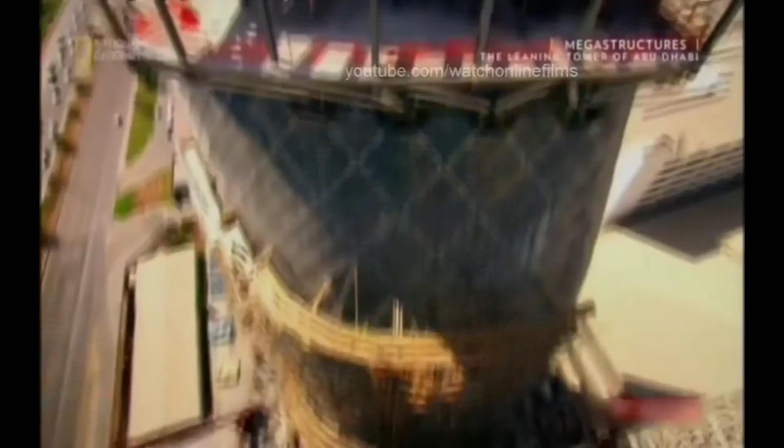To make it stand up, it'll take some extraordinary engineering that could rewrite the skyscraper rulebook.

Situated on the edge of the Persian Gulf lies the Sheikhdom of Abu Dhabi. It's the largest and richest of 7 states that unified in 1971 to form the United Arab Emirates. Abu Dhabi is undergoing one of the biggest makeovers of modern times.

Its ruler, Sheikh Khalifa bin Zayed Al Nahyan, wants to join the City Super League. And he's spending over $200 billion to transform his capital into a world-class business and tourist destination. He's already spent a reputed $3 billion creating the most expensive hotel ever built.

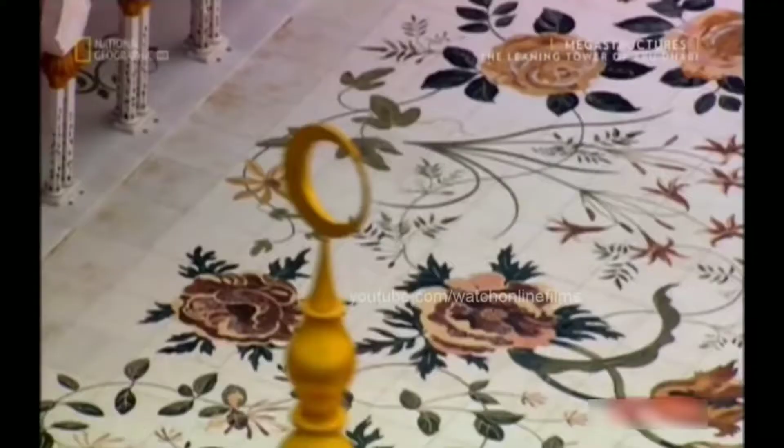The Emirates Palace boasts 114 gold domes and is the height of luxury, where rooms cost up to $12,000 a night. And that's not all. He's built one of the largest and most opulent mosques on earth. Capable of accommodating 40,000 worshippers, the Grand Mosque boasts the largest carpet on the planet and the world's biggest gem-encrusted chandelier. But even these structures have not quenched his thirst for the extraordinary.

Now, the Sheikh wants a building so spectacular it will instantly become an international symbol for Abu Dhabi. The man appointed with the task of delivering this architectural icon is the Sheikh's cousin, His Highness Sheikh Sultan bin Tahnoon Al Nahyan. Architecturally, it will be a unique building, positioning Abu Dhabi as one of the cultural hubs around the world, and architecture is part of that overall inspiration and art.

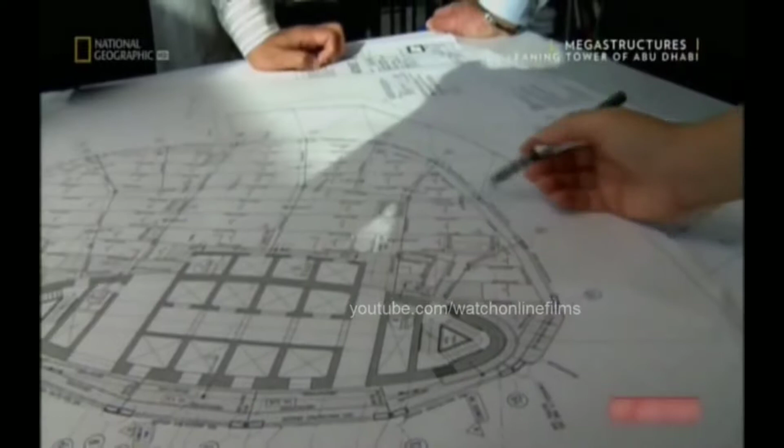It's a tough challenge. This is a land where extreme engineering is the norm. Neighboring Emirate Dubai has already built the world's tallest skyscraper, the 828-meter-high Burj Khalifa, and an iconic luxury hotel, the Burj Al Arab. Sheikh Sultan signs up a team of architects and gives them a clear brief, not to go bigger or taller, but to challenge the rules of architecture.

For Neil van der Veen, one of the concept architects, it's a unique opportunity. The spirit of the times in the UAE was that anything was possible. Really, you could do anything. We can do something in the architecture that will represent that Abu Dhabi is right at the cutting edge.

The architects look for inspiration in Abu Dhabi's landscape. They find it in the wind-swept dunes and the rolling waves of the Persian Gulf. We took this idea of wind and water, which are both dynamic, fluid type of rhythms of nature, and we said, how can we capture those in time? As a result, you get a much smoother façade. I was really very happy when we first saw it, because with such a building, you get the first impression from the first few seconds.

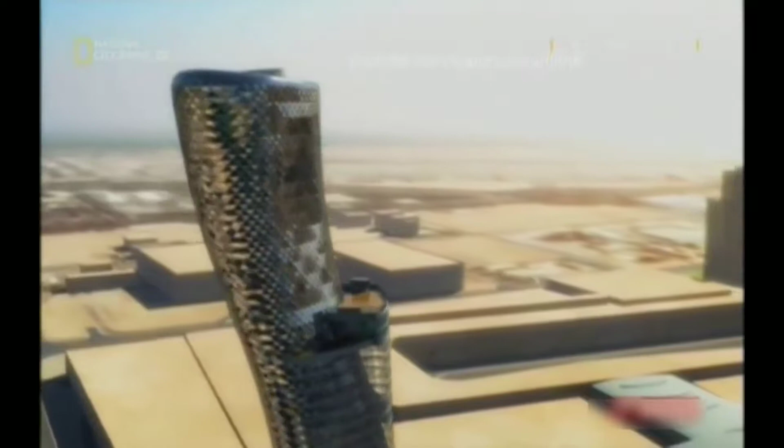The team come up with an extraordinary design. A tower that spirals out of the ground to 160 meters, inspired by a desert whirlwind and the splash of a wave rising over the sand. This gravity-defying skyscraper tilts almost 5 times more than Italy's Leaning Tower of Pisa. No single angle of this tower is the same as another. It's a structure guaranteed to amaze.

We really wanted this to happen. They could see a vision suddenly. They could see something that would stand for them. Then there was no stopping us. Sheikh Sultan wants the lower floors to become the most prestigious office address in Abu Dhabi, with the top 18 levels assigned as a 5-star hotel fit for royalty.

But for maximum impact, this landmark skyscraper also needs a prestigious location. The Sheikh decides the tower will stand next to a monument of national importance, the Grandstand. Built by his father and founding father of the United Arab Emirates, Sheikh Zayed, it's used to this day for national celebrations. This monument and the skyscraper will link Abu Dhabi's future with its past.

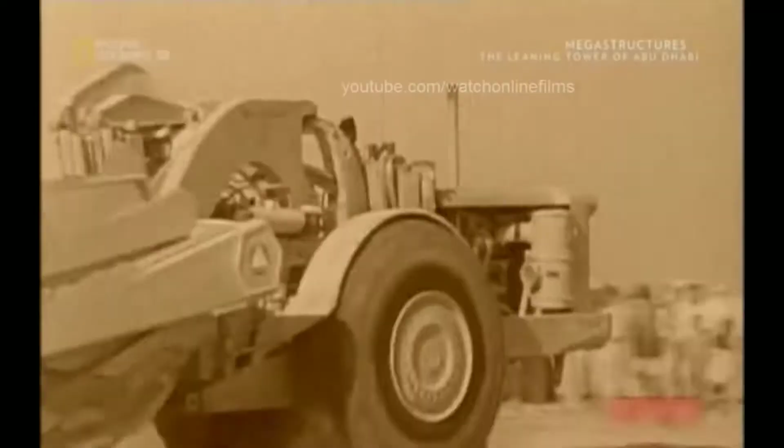Over the past 50 years, this land has experienced extreme change like no other. The discovery of huge oil reserves in 1958 set the wheels of progress in motion. Abu Dhabi's ruler Sheikh Zayed had a vision to unify the sheikhdoms and secure their financial future from Western dominance. He then set about using his black gold to create a city that rose out of the desert.

Today, Zayed's legacy is all around, and now his son wants to leave one of his own: to transform Abu Dhabi once again, but this time to put it on the world map. Sheikh Khalifa plans a new $2 billion business district called the Capital Center, situated alongside the Middle East's largest business hub, the Abu Dhabi National Exhibition Center. It's the ideal location for an architectural icon, and inspired by its location, the new tower is named Capitalgate.

Now, the idea must make the leap from the drawing board to the construction site. The only problem is, no one has ever attempted a skyscraper like this before. Everyone realized that this is a crazy structure to build, and how are we going to build it?

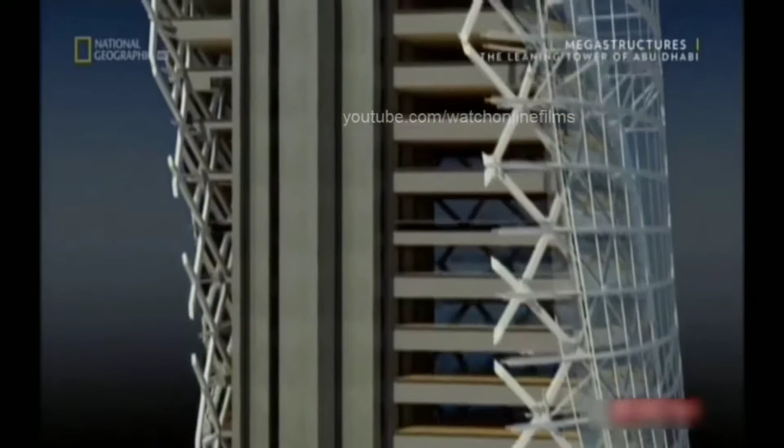To make Capitalgate's gravity-defying design a reality, it'll take some extraordinary engineering, and the challenge begins on day one. Its top floors overhang its base by 33 meters, creating huge forces that want to rip the building's foundations out of the ground.

At the construction site, project architect Tony Archibald is daunted by the task ahead. When I first joined the job, I was shown the drawings, and I kind of did a double take, and I wasn't quite sure that I got the correct understanding of the project, and it took me a few moments before I realized what we were about to undertake.

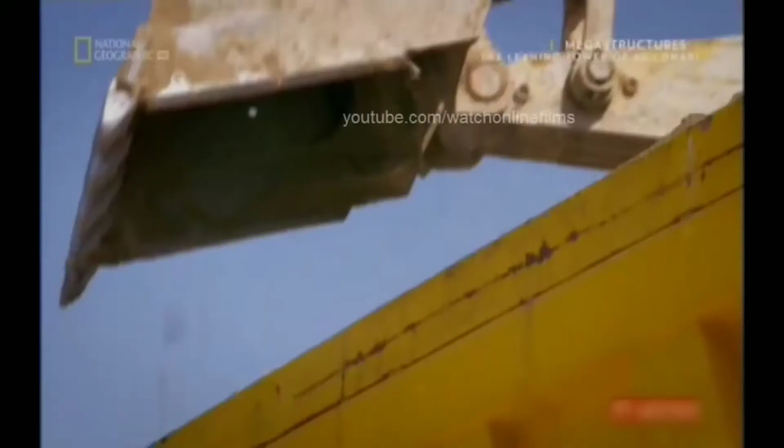Keeping Capitalgate upright is a huge engineering challenge. There isn't just one solution. To overcome the forces of gravity, it will take a whole range of pioneering techniques. But the task starts with the foundations deep underground. On one side of the building, the weight is going down into the ground. On the other side, it's being lifted out of the ground. And that's due to the large overhang that we're having to deal with.

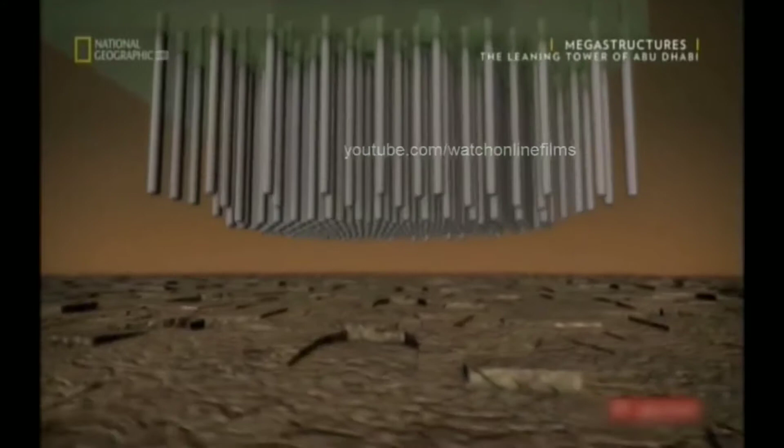The solution requires almost 400 concrete piles that work in 2 different ways. On the leaning side, half of the piles push the overhang's forces into the ground. On the opposite side, the remaining piles anchor deeper into the bedrock. They resist the stretching forces, trying to wrench the building out of the ground.

Finally, to evenly distribute Capitalgate's forces into the piles, a deep concrete slab reinforced with steel is laid on top. What the foundations taught us is that every single aspect of this building has to be custom engineered.

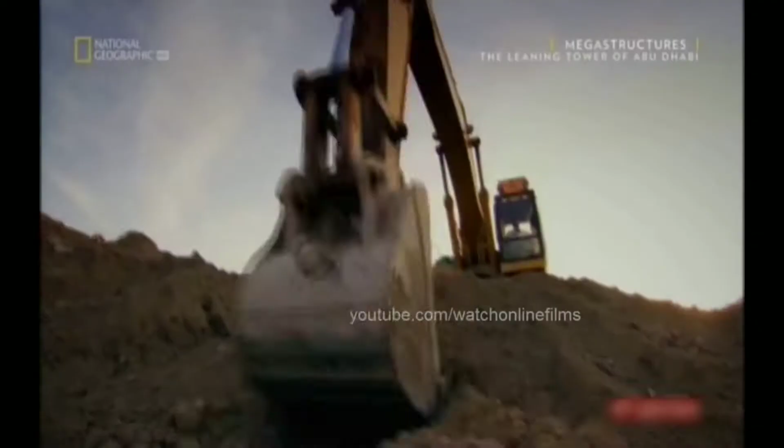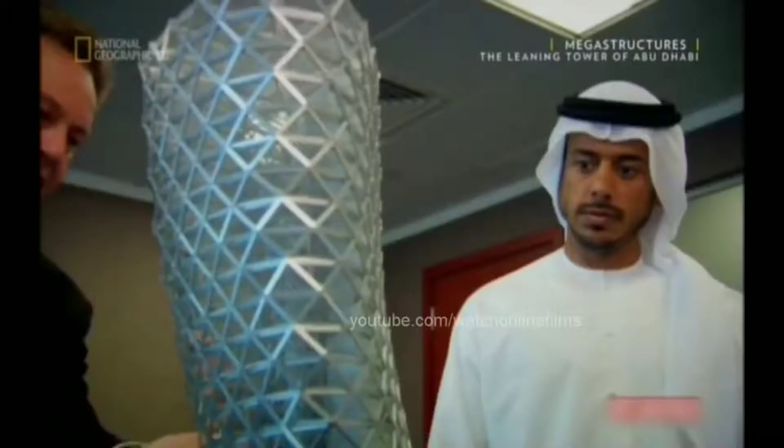Excavators dig out a colossal 6,000 cubic meters of sand. And over 8 weeks, hundreds of piles are driven into the ground. We had an awful lot of piles to put in a very close proximity. It was a real difficult challenge. There can be no let-up on this schedule. Sheikh Sultan wants Capitalgate complete by an impossibly tight deadline.

With the foundations finished, building above ground can begin. But because of the dramatic lean, it will have to be constructed in a very different way to a conventional skyscraper. We realized once we'd done the foundations that this was going to be the first of many difficult problems. A normal skyscraper requires a solid core to hold it upright. But Capitalgate's curves will just crack and topple a standard core. Engineers must discard conventional thinking and devise a way to defy gravity.

Inspired by the nearby desert landscape and its wind-shaped dunes, architects have designed a curved leaning tower. But it'll take some audacious engineering to stop Capitalgate from falling over. Normal skyscrapers are built around a slim vertical core, which helps to channel the building's weight into the ground. There's so much overhang on this building that a conventional core was no way going to work. You just can't build a straight core. It's just not strong enough.

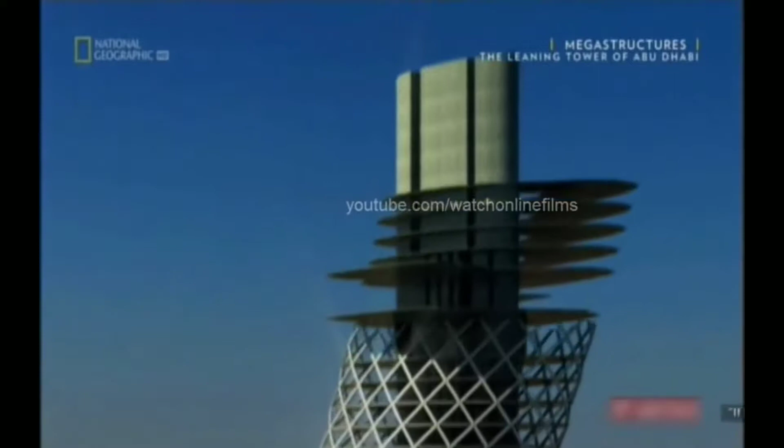Capitalgate's design would cause a conventional core to bend dangerously. The pull of the massive overhang wants to stretch the core on one side, causing the concrete to tear apart.

Structural engineer Mona Vassi knows it's a serious problem that must be solved. When I saw this one, I thought it's impossible, it's not going to work. It's just some sketch, somebody left it somewhere. But I always think that for the architects, it's easier for them to just draw something, but it's not easy for us to fulfill or satisfy their needs.

The engineers developed two groundbreaking solutions. The first part of their plan is to build the core with a curve, bending in the opposite direction to the building's lean. As the structure grows, its weight pulls the core straight. In total, it shifts 350 millimeters, and the effect is significant. The concrete that would have been stretched by the overhang's pull will now be compressed and strengthened.

You build it bent, and then as you add the slabs to the upper levels, it pulls it back into vertical. So basically that whole vertical core is in compression, and that gives it immense strength.

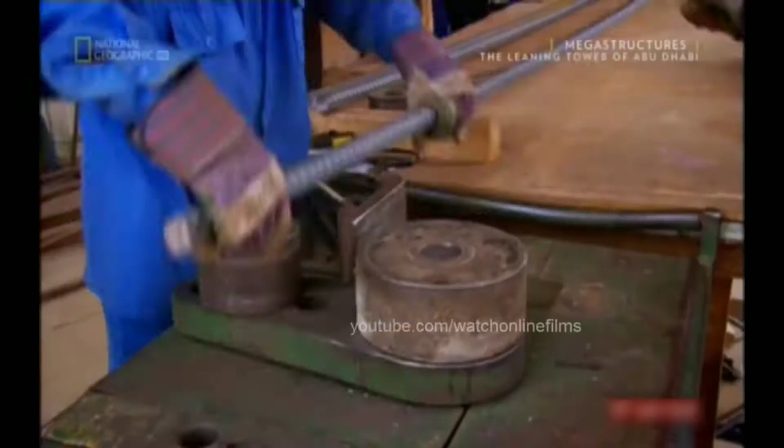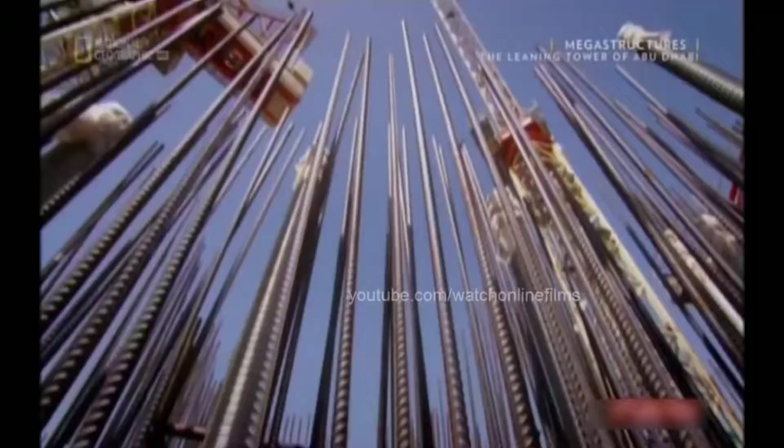The core grows 4 meters a week, and construction manager Les Fairchild is in charge of building it. This is probably the most complex core that I've come across. It's built at an angle, and effectively the core holds the whole building up. The core is built using a technique called jump forming.

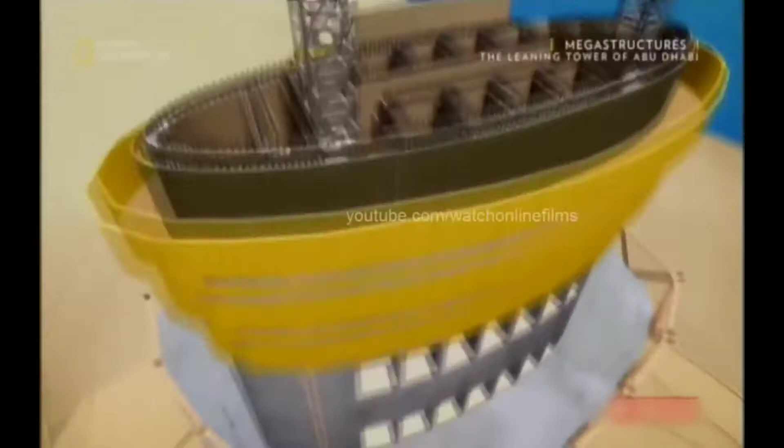First, a dense mesh of steel reinforcement is assembled. A mold then closes around the steel to form the shape of the core. The steel mesh is then filled with concrete. Then the mold or form can climb up the core wall for the process to start all over again.

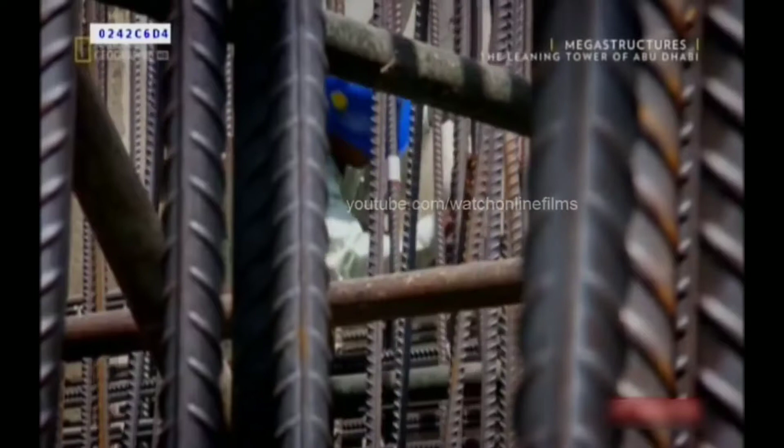Jump form is a hydraulic platform. Once we've cast each 4-metre level, we simply attach it to some runners and we jump it hydraulically up to the next level. The core will be strengthened as it straightens. But for the core to carry extreme loads, the concrete must be reinforced using steel rods called rebar.

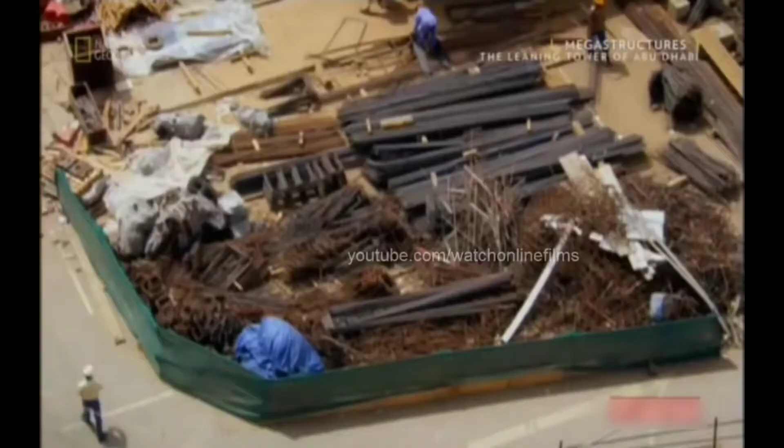The rebar is installed during the daytime, but temperatures of up to 50 degrees Celsius and concrete don't mix. It dries too fast and could crack. To set at the right speed, the concrete has to be poured during the cool of the night. As the core grows higher, the liquid concrete has to be pumped over longer and longer distances. So the consistency of every batch is first checked in a slump test to ensure it won't block the pipes.

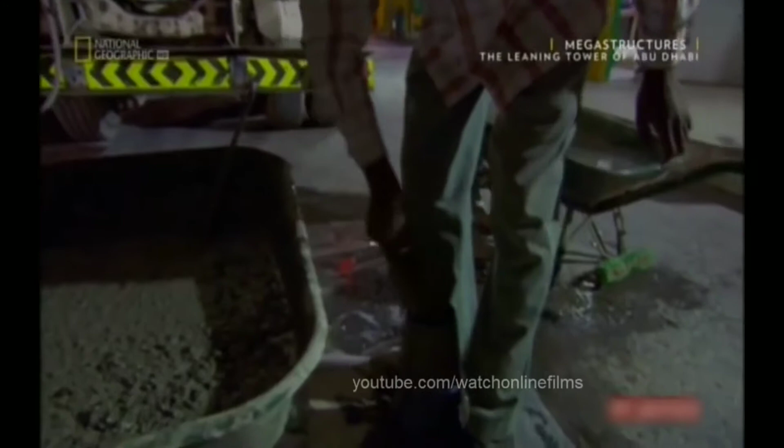When you first see it coming out the wagon, you can usually tell whether it's a tight mix or whether it's a loose mix, and that's what we're testing for really in the slump test. We simply make a cone, lift the cone off, and depending on how much it reduces in height, tells you exactly what the slump is. The one we just witnessed is 215 millimetres, which is within the specification, so that's good to go.

Whilst the truck drives to the pump, Fairchild needs to get onto the core. He can take the stairs, but 90 meters up is a long climb. He knows a much faster way. Crane lift.

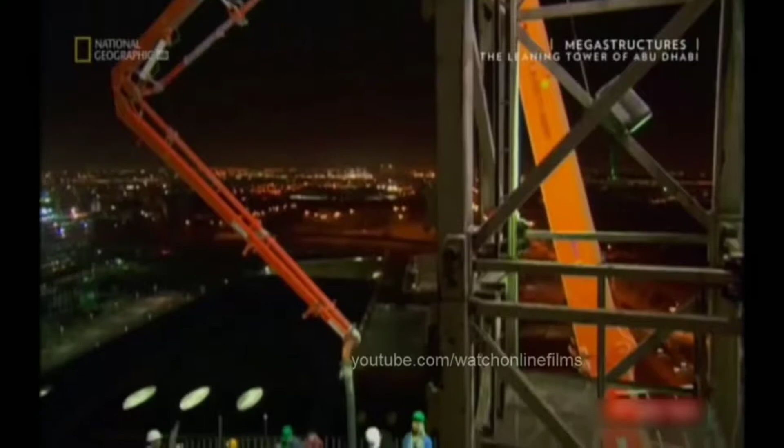It's going fairly well. We've had a nice continuous supply of concrete and we're now pumping it up to the upper levels of the building. And the lads are just steadily working away. They actually work from one side to the other in metre deep layers, so they're doing everything right. It's always exciting when we pour concrete. It means it's another achievement really. We're going up another level.

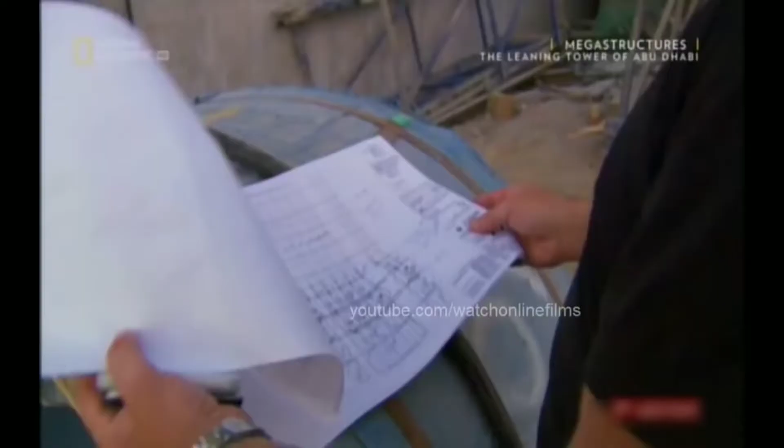But building the core out of alignment and packing it with rebar still isn't enough to stop gravity toppling Capital Gate. What we came up with is a post-tensioning solution where we introduced much more reinforcement into the core wall and then used the tensioning process. Basically that was done by introducing high tensile strands to the centre of the walls. When we reach the designated height, we simply apply tension.

We're actually stretching the tendons that fall through the wall and we're actually pulling them tight, and that's done by a tensioning machine. So effectively, when the tension is complete and the load was applied, the core would stay intact and the additional reinforcement would prevent it from falling over.

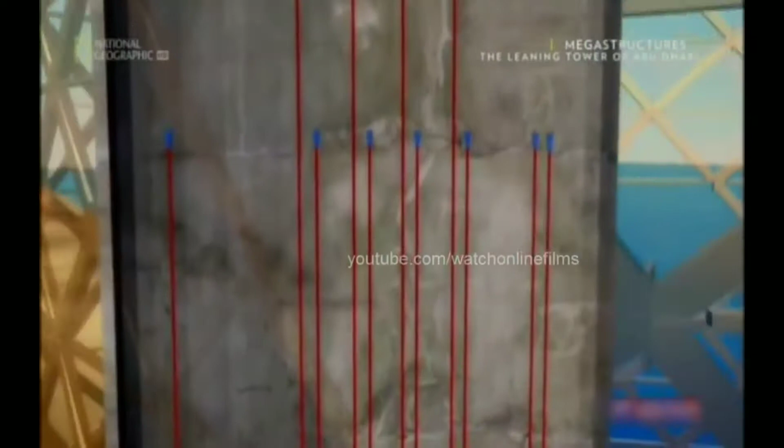To post-tension the core, 146 steel tendons are threaded vertically through the concrete. Each tendon is 20 meters long and runs through 5 floors of the building, overlapping each other for maximum strength. When the tendons are stretched, the stress counteracts the pulling force created by the massive overhang, stopping the concrete from tearing apart. Okay, stop. Okay, start moving.

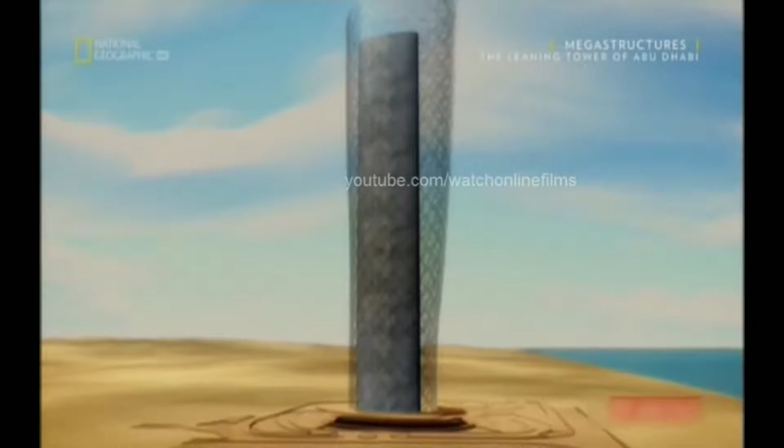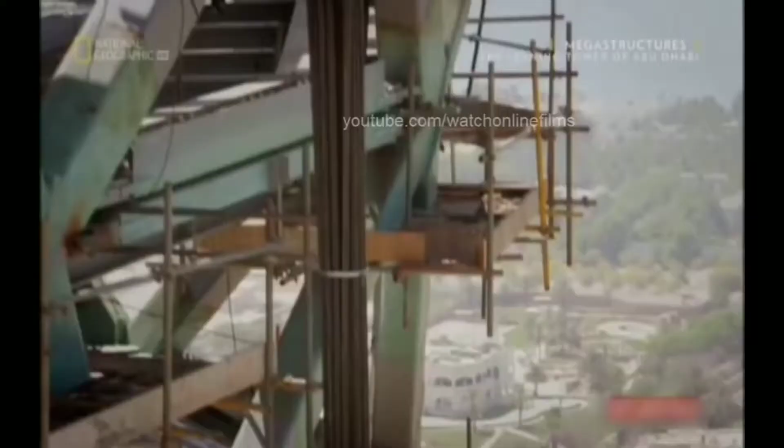On site, the team are post-tensioning the core. But no one has ever attempted this vertically in a skyscraper. The long tendon is lifted to the top of the core. The team used the steel tendon's weight to force it through a duct already cast through the core. Once the tendon is in position, the team lock off both ends, ready to tension its individual strands.

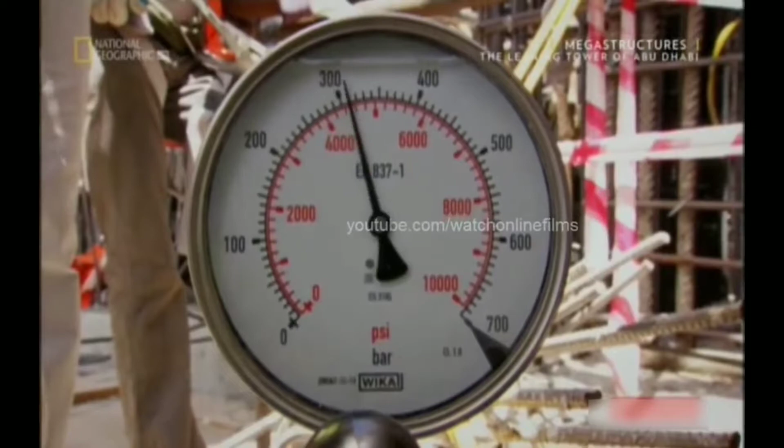A hydraulic jack clamps around one strand at a time and stretches it. It's equivalent to about 5 family cars pulling on one end of the rope. With the steel tendon now stretched to the right stress level, concrete pouring can continue upwards. The quantity of cable that's been used is approximately 120 tons and 120,000 meters in length. It's about 44 times the Golden Gate Bridge. This process is repeated over and over and means the core should withstand the huge loads generated by Capital Gate's extreme overhang.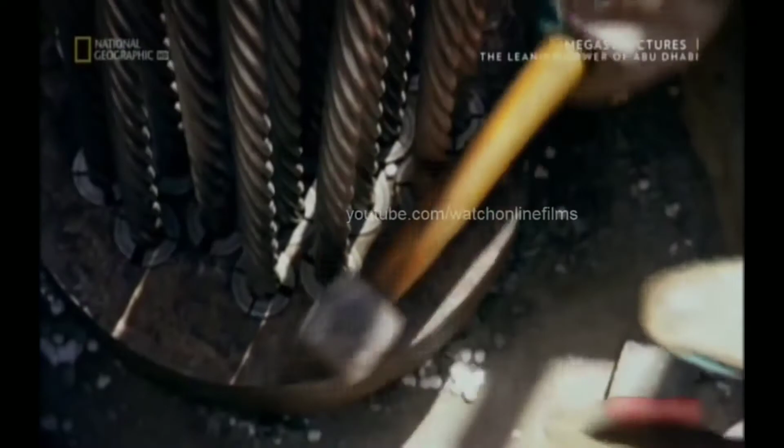But now, an even greater challenge must be tackled. The building's twisting, leaning design must somehow be turned from theory into reality. And once again, it'll mean bending the rules of architecture.

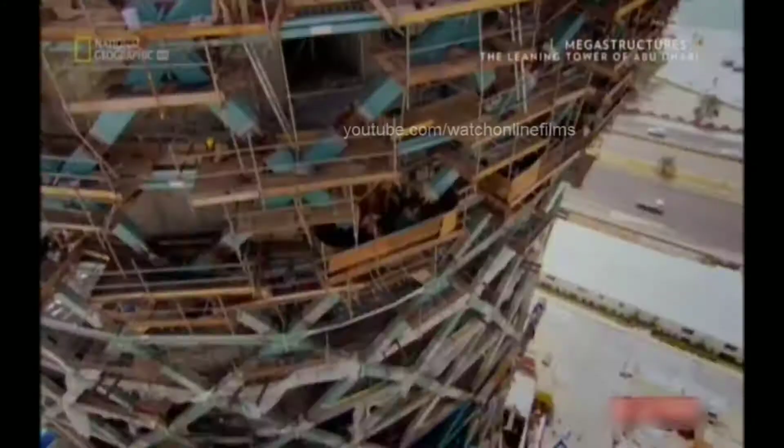To create Abu Dhabi's architectural icon, Capitalgate needs an exterior curved leaning frame. But once again, the building's extreme tilt creates a problem. The shape of the building with this very pronounced overhang meant that traditional skyscraper building solutions just weren't going to work. There was no way. The building design requires it to be thin to maximize floor space and allow for huge panoramic windows.

Irfan Ahmed is one of the engineers who has to find a solution. For structural engineers, it's always challenging to accept the architectural requirement, you know. They always want thinner and thinner and thinner. Surprisingly, the humble chicken could help with this engineering dilemma. It is essentially a skin of structure around the outside of the building, not unlike an egg.

An egg can withstand huge loads because it evenly distributes forces down through its shell, which means the shell can be thin, creating more space inside. So it's very, very thin, it's very, very strong. If I try to crush this egg, you can see that it's actually amazingly resilient. So let's see how resilient.

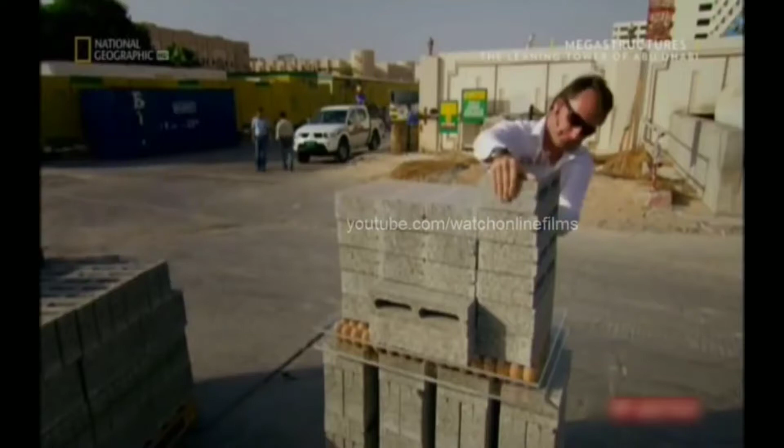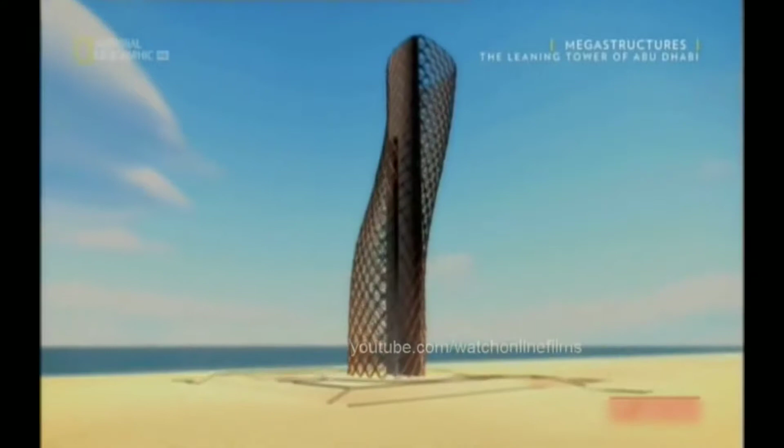Capitalgate can't channel forces with eggshell, but it can use the principle of how it works, using a diagrid. A diagrid is a giant mesh of steel that wraps around the core. Steel beams connect to a node or joint to form a cruciform section. 720 uniquely shaped sections link together to form the thin but immensely strong diagrid. Working together, these cruciforms equally distribute the forces down the outside of the building.

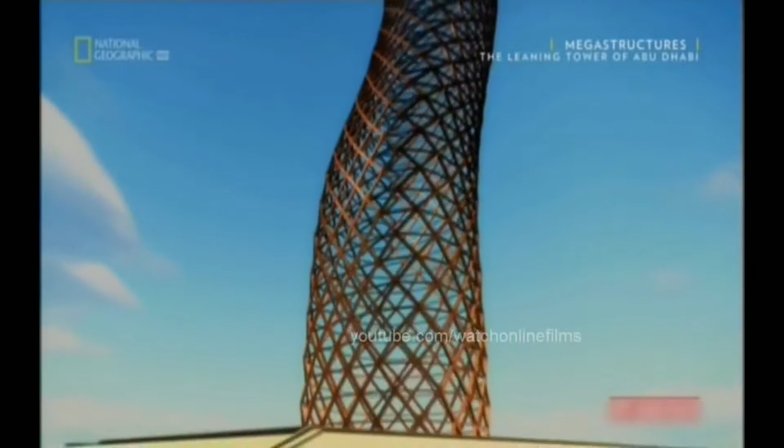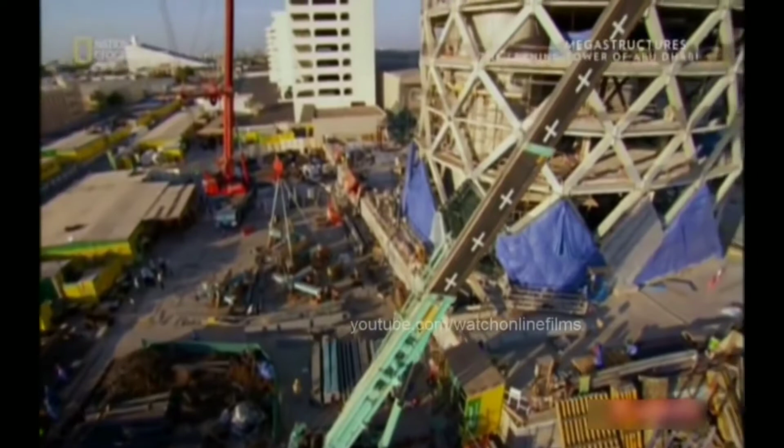The way it does that is by making a uniform net, so that the forces are very evenly distributed, and that means that we can get away with slenderer sections. On site, a team of 240 steel fabricators assemble the diagrid. They've built the easier straight part of Capitalgate's base, but now the structure is starting to lean, making installation even more challenging.

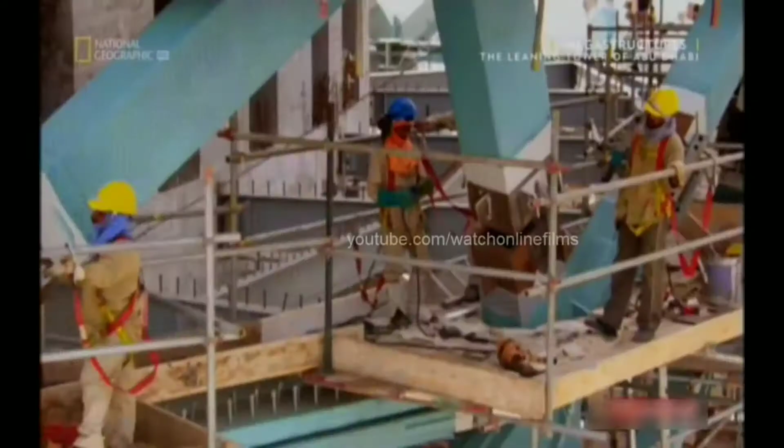Each cruciform, weighing up to 16 tons, has a unique geometry and must be crane lifted at a precise angle. If the diagrid is not assembled with millimeter accuracy, the mesh will not channel the loads and the structure could be weakened. The engineers must communicate closely with the expert steel fabricators. They design and manufacture the diagrid 150 kilometers away in the neighboring emirate, Sharjah.

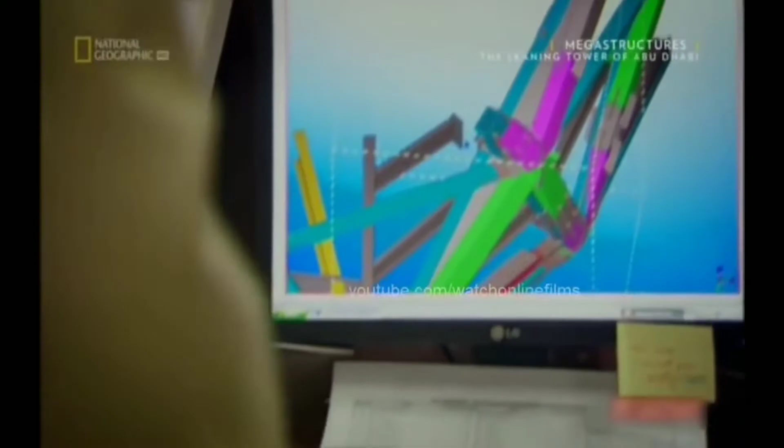Here, cutting-edge construction is the norm. They've built one of Malaysia's Petronas Towers and Dubai's iconic skyscrapers, the Burj Al Arab and the Burj Khalifa. But Capitalgate's revolutionary design pushes even these experts to the limit. On the planning floor, project engineer P. Bhaskaran and his team need bespoke 3D software to tackle the building's highly complex diagrid. The 3D modeling is done, and any unforeseen criticalities will be very clearly identified in the 3D model.

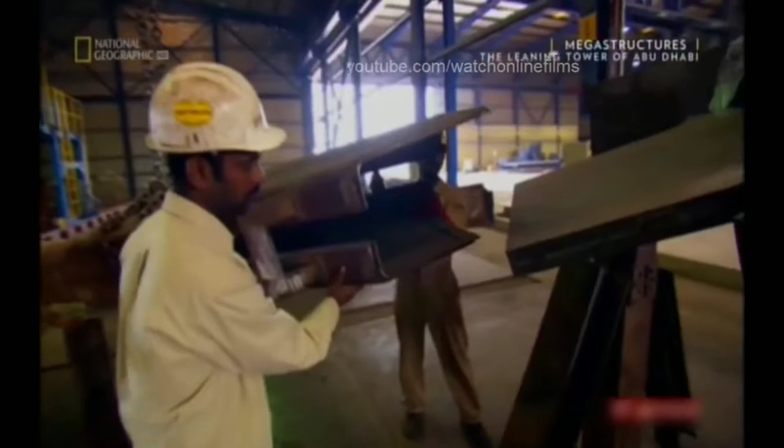Each one of the 720 cruciforms is precision engineered, not only to channel huge forces, but to connect with millimeter accuracy to the neighboring cruciforms and the glass facade. But to measure their exact angles, the team used some old-school technology: chalk. It might look unsophisticated, but it's highly accurate, ensuring all the elements will join together. To keep up with construction, the factory must produce 18 cruciforms every week.

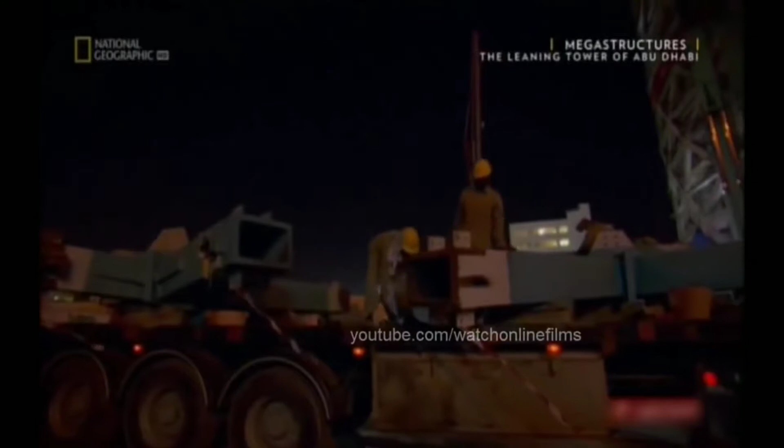Constructing such a huge building, the critical building within the short span, without working 24 hours, it is absolutely not going to happen. As the skyscraper reaches new heights, the long hours start to pay off. This design pushes the diagrid technology to its absolute limit, and in fact far beyond what's ever been achieved so far. Even in your dreams, you're thinking about this project. So once you see the structure coming up, you forget all the long hours you spend and all the sleepless nights.

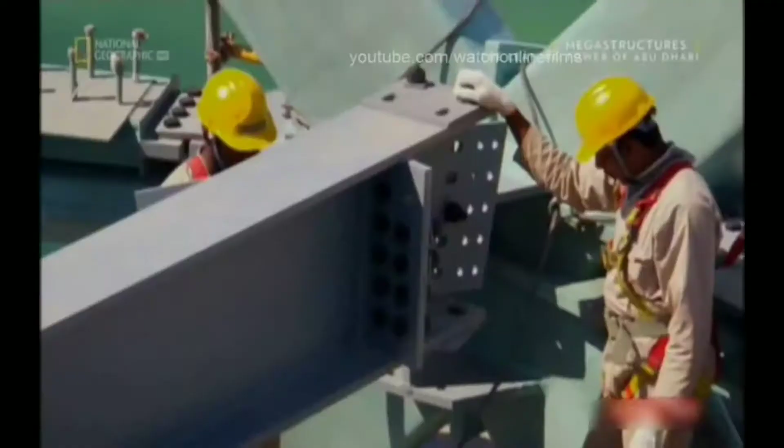A colossus is fast emerging from the Abu Dhabi sands. Now, this leaning tower must be clad with a glass facade. And as always with this gravity-defying structure, it's going to require some revolutionary engineering.

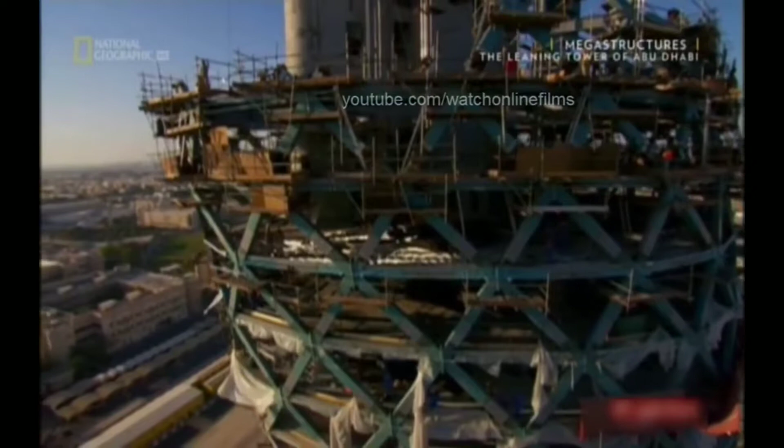Glazing Capitalgate's leaning curved frame is a major problem. Covering its unusual contours with curved glass will blow the budget. So the skyscraper's curves must somehow be clad using cost-effective flat glass panes. Fortunately, ancient Greek geometry can help.

Because you've got a complex shape, it's an organic shape, it's a curved shape, the only way to model that with straight lines is to use triangles. Triangular panes can pivot in 3 directions, and when joined together can cover complex geometric surfaces. But because every angle of the building is unique, it'll take 26,000 triangular panes to form the facade.

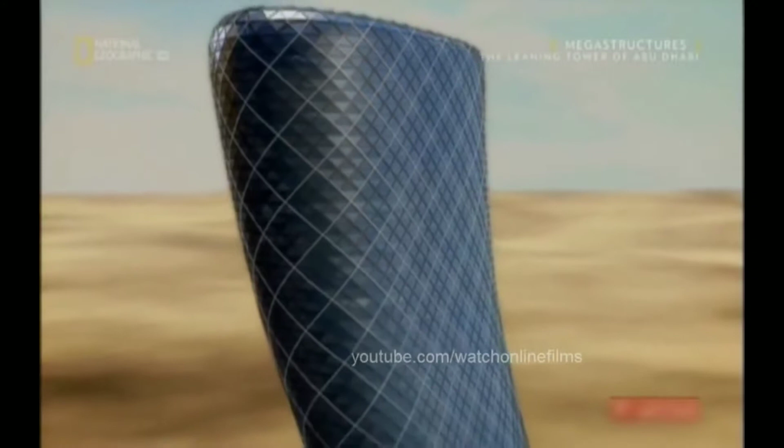With so many glass triangles to cut, the local glass factory springs into action. Each pane is scored by an automated diamond cutter to an exact pattern. The triangles are then sent along the production line. The team is under constant pressure to deliver enough glass to the site.

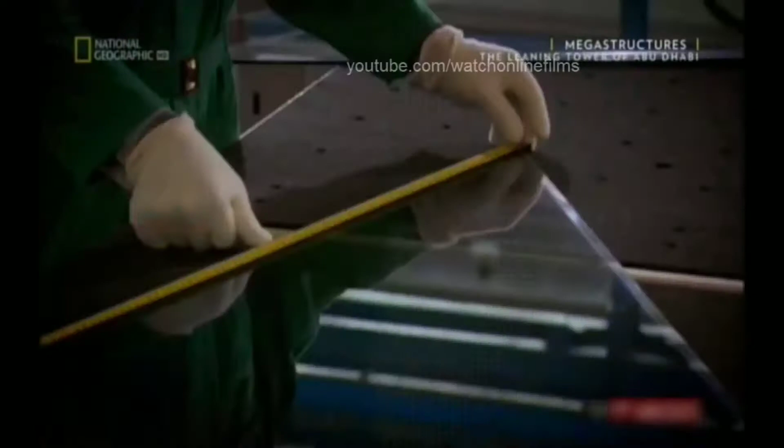Hey, this side, you guys, hold it. After several weeks, 8 diamonds are in place and another 100 standing by. But the glass design is so unconventional, it still has to pass a number of tests to prove it's up to the job.

Because we'd already started the glass installation, the results of this test were absolutely key. Each panel is stacked one upon the other. So if we'd had any kind of problem, we would have had to unstack them, which would have had disastrous consequences for the program.

This is no ordinary glass skin after all. Capitalgate's core straightens as it grows. The skyscraper will not stop moving until after completion. Normal glass facades can accommodate minute movements caused by wind and temperature changes. But to stop the glass shattering and keep the building watertight, the panels must be designed to shift by up to 20 millimeters.

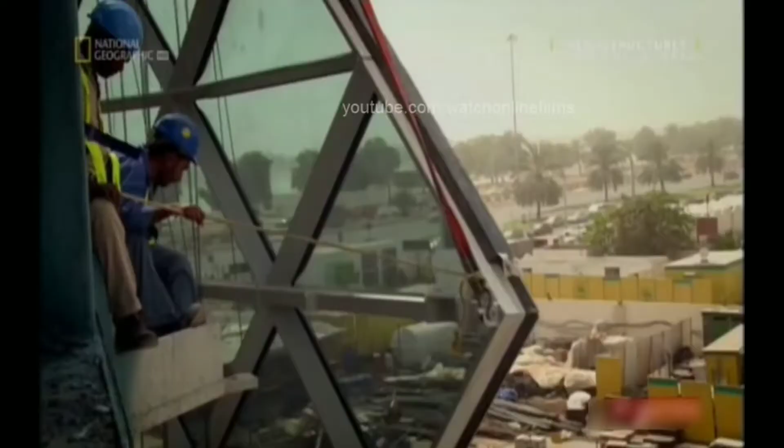The scale of that kind of movement is almost unheard of in glazing systems. It's a vast amount of movement. With glass installation ongoing, construction manager Craig Rooney needs to know the panels will perform. We don't want to get to the top, we've done it, we've installed it, we think we've done a great job, and then it all leaks.

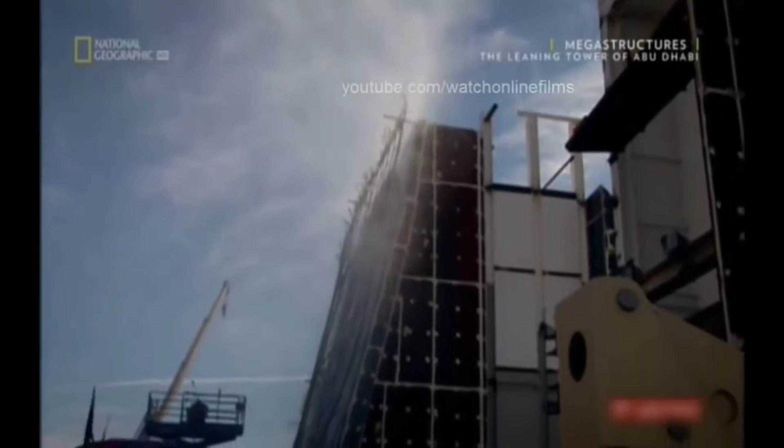The panels must be tested to the limit at a Dubai laboratory. A plane engine and many litres of water simulate worst-case scenario weather. Now the moment of truth. Any leaks could be a disaster. And it's bad news. The first time we got a full water test, we had a leak. The fact that we had a leak was devastating to the whole team and very alarming.

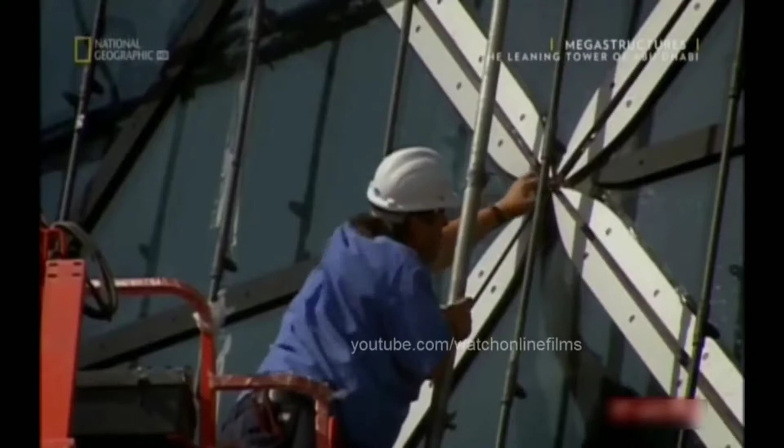The diamonds connect to each other by a bespoke two-layer seal. The flexible spongy seal allows the diamonds to move and keeps water out. But if any water does seep through the outer seal, drainage tubes fitted at intervals let the water flow away. The panel has failed the test. Water has flooded inside and penetrated the inner seal.

If it was a fundamental failure, we're back to the drawing board, so the cost and the budget and the program all go completely out the window. The panel is examined. Answers are needed fast. Fortunately, it's not a design failure. They discover a drainage tube is only blocked with sand. The problem resolved, installation can step up a gear.

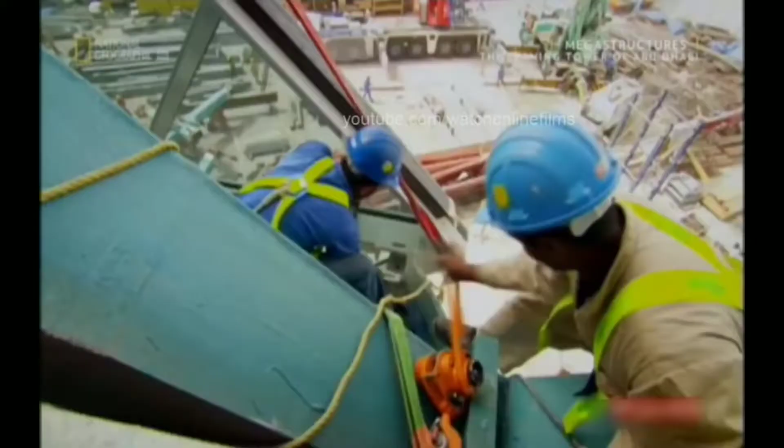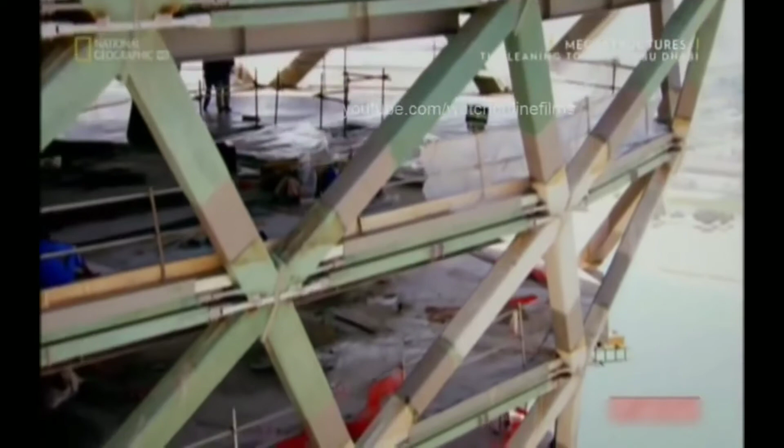But as always with this audacious building, one problem is solved and another is just around the corner. To give Capitalgate's five-star hotel lobby the wow factor, architects again plan to push the design to the extreme. Now they want to build an infinity pool and a restaurant, hanging 100 meters above the ground.

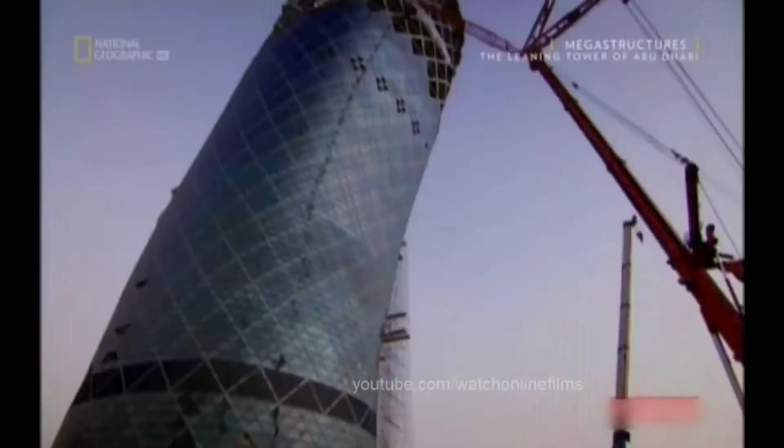18 months into the build, Capitalgate's design is about to give a new slant on high-rise living. The architects want a pool deck and restaurant suspended in the sky, but it's an engineering headache. There's so many requirements that architects have that really put us in so much trouble as engineers, but you want to make sure you have a safe structure.

The design calls for a two-story extension, hanging without any visible support. But the pool's water alone will weigh 150 tons. The structure's huge mass means it needs reinforcement. We needed some supports from below, otherwise there was no other solution. I don't think you can have a cantilever that huge on this building, no way.

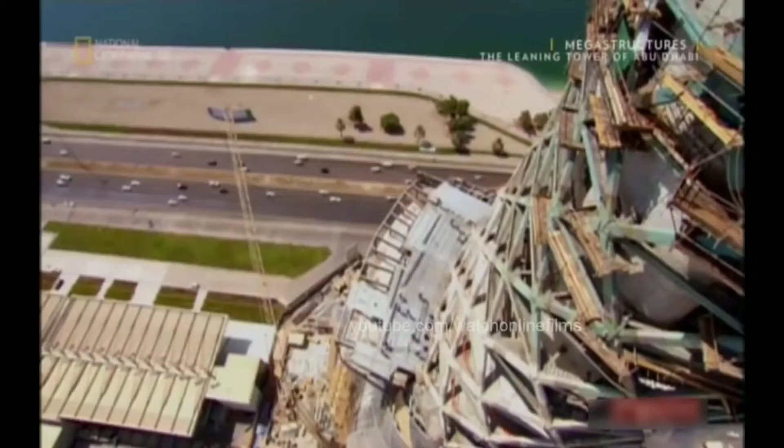The design will only work if it's underpinned with 22 steel struts. They will carry the loads back into the building. But the struts must also look delicate to meet the architect's aesthetic demands. On the construction site, 90 meters up, the pool and restaurant is taking shape. All of its structural elements are in position, except one. The team are raising its last 6-ton floor beam.

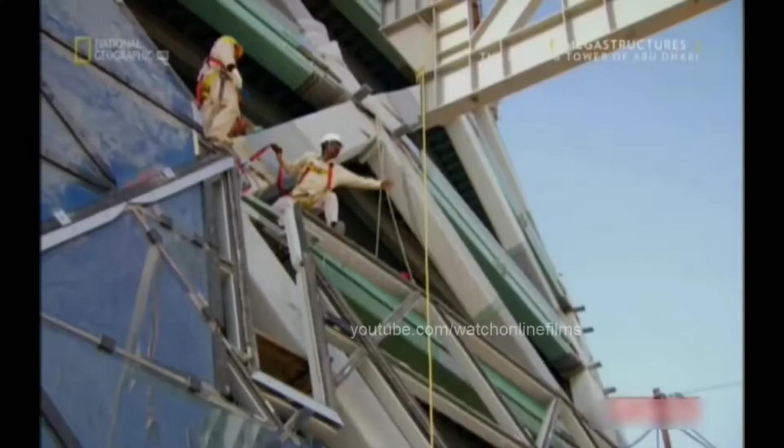It's taken many crane lifts, but one of the highest suspended swimming pools in the world has made the leap from blueprint to building. See all those lines that you just drew? They're actually drawing the same thing for you, but with a crane. But the feeling is indescribable.

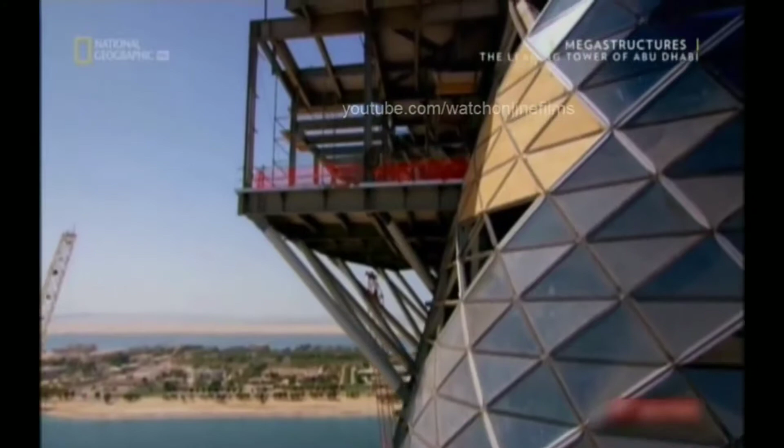And the structure's muscular struts and connections are also elegant. The idea behind these junctions is that they behave like the insects that can walk on water. They're sufficiently light that the surface tension keeps them above the water. So these little brackets dissipate the forces from all that weight.

Capital Gate is fast becoming an Abu Dhabi landmark. But the taller it gets, the more the weight of its upper floors is a problem. The skyscraper needs to go on a diet. And this time, the architects come up with a clever solution. The building has lots of visual surprises.

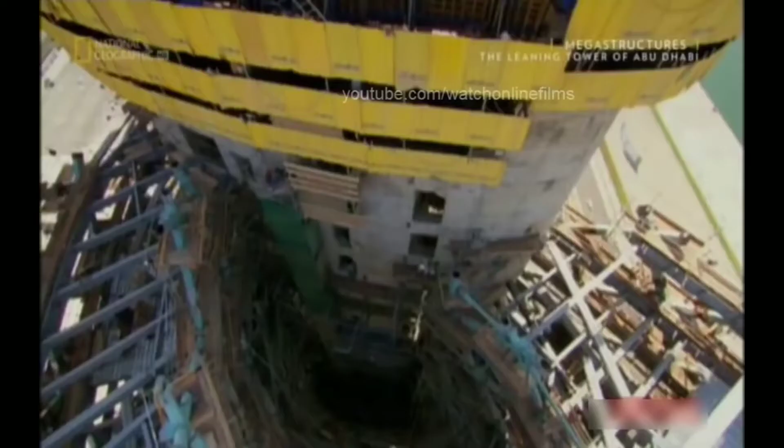And one of the most important ones of those is the internal atrium. It's a kind of a light well that brings light from the sky deep inside the building, and it extends over half the height of the building. So it starts out very, very small at the bottom and opens out in a big funnel. This cavernous hole is good news for reducing weight and minimizes forces.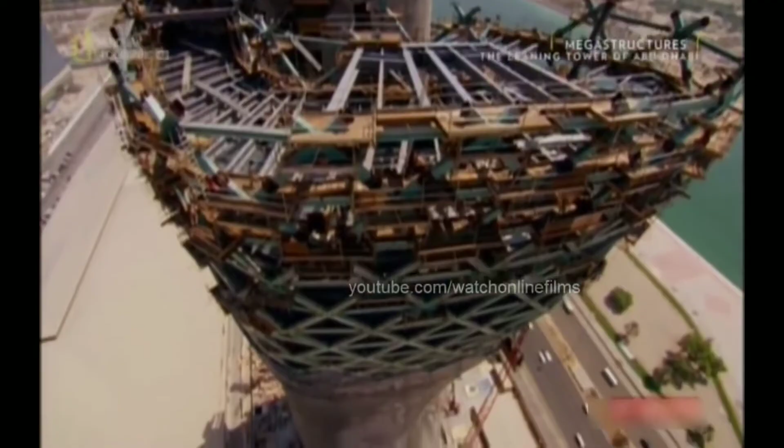But the atrium is a double-edged sword. The floors are critical in transferring loads from the diagrid to the core. A giant hole through 18 floors means these loads must find another pathway. It's a very, very big hole in every single floor plate. So our engineers really had their work cut out.

You don't want to have an opening in your floor. You want to have more reinforced concrete to transfer these forces. The forces need to flow away. And the solution is pioneering. An internal web of steel mirroring the external diagrid. This is the first time we've ever heard of this being done.

The internal diagrid is actually a fundamental part of the structure. This funnel-shaped internal skeleton carries the forces of an 18-story building down to its tapered base and into the core. But the loads are extremely high for such a small area. To stop the atrium punching through the core wall, the concrete needs protection.

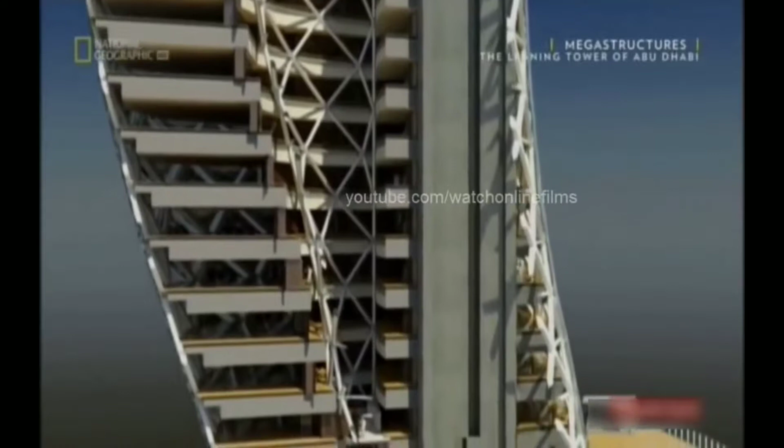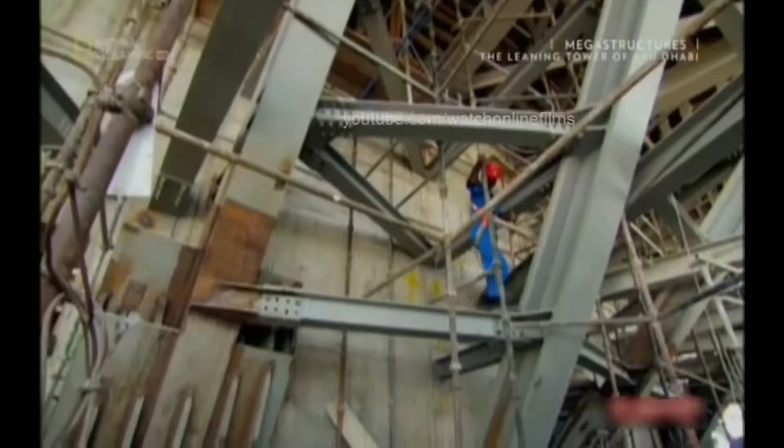The answer? 6 giant plates of steel that brace the connection to the core wall. The connections are really a wonderful piece of engineering. They're 8 meters high. They span 2 floors and they connect back into the core. The atrium's near completion brings Abu Dhabi one step closer to achieving an iconic landmark.

But as the sun goes down, this isn't the only celebration underway. On site, the Indian steel team are holding an annual blessing to the Hindu god Lord Vishwakarma, the protector of architects and engineers. Their livelihoods depend on staying safe, and although they use safety equipment and are highly skilled, working with huge sections of steel at height is never risk-free.

We pay our respect to God and get the blessings from the God. We do that for the safety of all our workers and for the proper completion of the job. Every trade of workers, the basic tools they are using on site, has to be kept in front of God, and the workers feel that they are in safe hands. The tools are now blessed, and the steel team's morale is high.

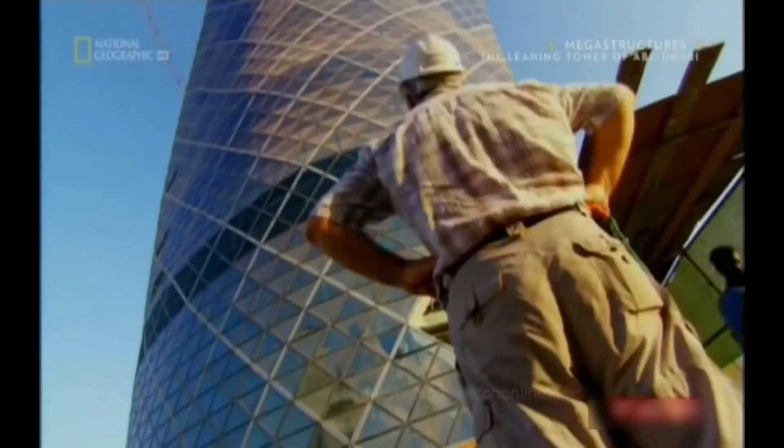But the glass installers, lifting diamonds to over a height of 100 meters, are getting the wrong kind of lift from Abu Dhabi's highly unpredictable wind. If the wind is too strong, then you can feel this in your hands when you hold these diamonds by rope. I always get nervous if I see the panel starting turning. And this makes me always a little bit afraid when I see diamonds going up and starting moving.

Meyer has to act quickly, or this 4-ton diamond could smash into the building. Not for the first time, lifting glass is delayed by changeable weather. At this rate, Meyer won't install the remaining 107 panels in time. But Abu Dhabi's wind isn't the only problem the Capital Gate team face. A last-minute design request comes in from the Sheikh's office that could have serious implications.

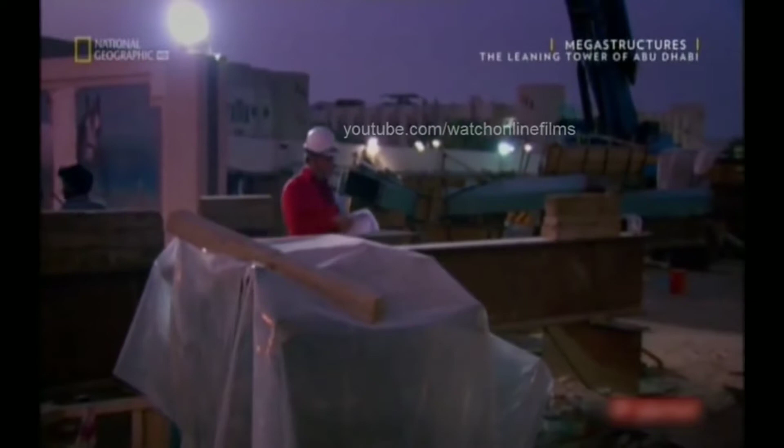With just 6 months to go to completion, the Capital Gate team should be on the home straight. But those plans may have to be put on hold. I had a telephone call saying that we had to put a helipad on the roof, which I didn't think was a joke, but I was astounded that we got this at such a late point in the project.

Integrating what will be Abu Dhabi's highest helipad atop one of the world's most daring skyscrapers at first seems a simple request. But it actually poses 2 serious problems. It'll create new forces that must be absorbed by the already strained core, and unpredictable wind flows that can cause potentially lethal flying conditions. You get a thing called wind shear, tipping the whole helicopter onto its side, and this is a very real and very dangerous risk.

These rapid wind changes, known as wind shear, can affect the lift on helicopter blades. Aircraft can be blown off course, or literally fall out of the sky. There is no way that we could have any margin of error on the safety. The only way we could predict what the wind shear would be like on the top of the building was to model it in a wind tunnel.

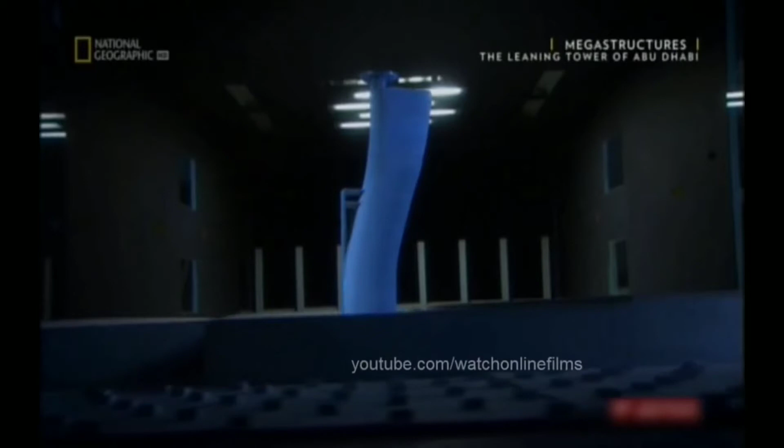In London, England, a scale model of Capital Gate is put through its paces in a high-tech wind tunnel. Just as the team fear, within seconds, wind shear conditions appear. Air currents are flowing over the top of the building, but then separate from the surface, spiraling inward to form a realm of turbulence.

Wind engineer Leighton Aurelius knows the consequences could be serious. If the pilots lose control in this random ball of energy here, they may in fact end up crashing onto the helideck, or even worse, onto the tower itself. I'm sure that can occur. But that's not all the wind tunnel test reveals.

Wind impacting the helipad is also creating huge suction forces. We're talking about very large forces here wanting to pull the helipad off the top of the building. Something in the realm of several large trucks or big rigs trying to pull this helipad away.

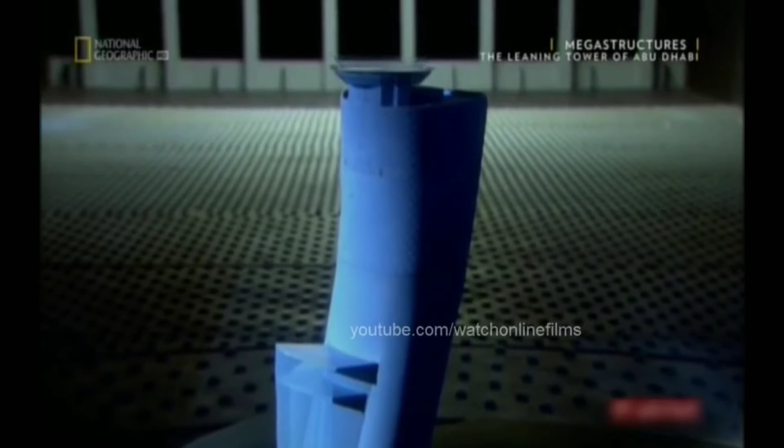To make the helipad safe, Aurelius and his team have to go against conventional thinking. We didn't think that lowering the helipad was actually going to be the optimum design, but we see reduced loading on the helipad as well as safer conditions for the pilots to land in. Lowering the helideck to just 2 meters above the roof dramatically decreases the wind shear threat, and means Capital Gate's core will withstand the additional loads.

We're relieved, frankly. The tests have actually confirmed now that we can have it in our original design position, which is very low, which will mean that the profile on the skyline is exactly where we want it. But it'll take another 5 months just to draw up the helipad's blueprints, and a crane must be left behind to build it.

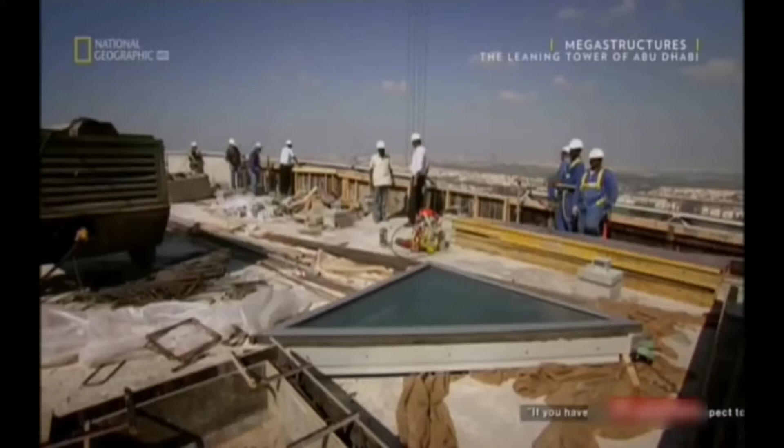Now, with only weeks to go until zero hour, the team are installing one of the last glass panels. It's a moment that once seemed a long way off. In my office I have a plan of all the diamonds we have to install, and in the beginning it looked like I'm in jail and I'm marking the wall with marks for each day. And so at first I felt I never will finish this project. Just 10 months since the first diamond was fitted, the facade now shimmers in the sun.

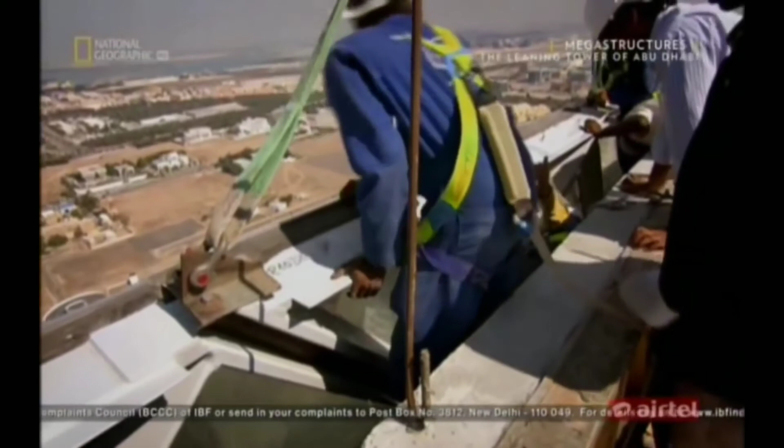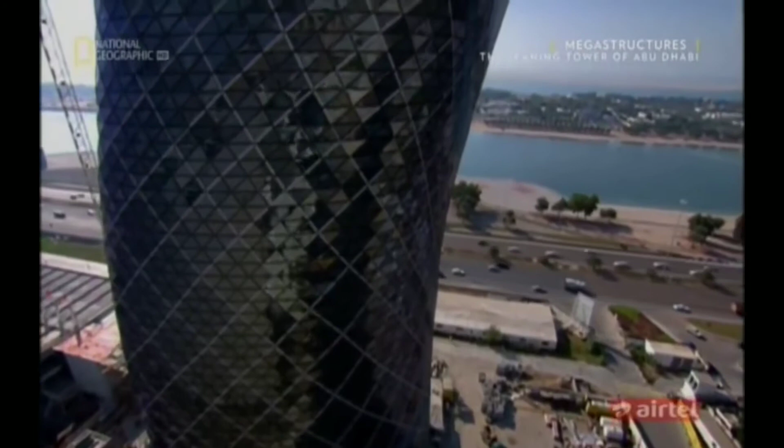Capital Gate's internal fit-out will take another year. Only then will its 5-star hotel and Abu Dhabi's most unusual office address be open for business. But against the odds, the team have created one of the most extraordinary megastructures on the planet. Capital Gate twists and spirals out of the ground, soaring to a full 162 meters. It's taken nearly 6 million man-hours to construct, and its overhang is spectacular.

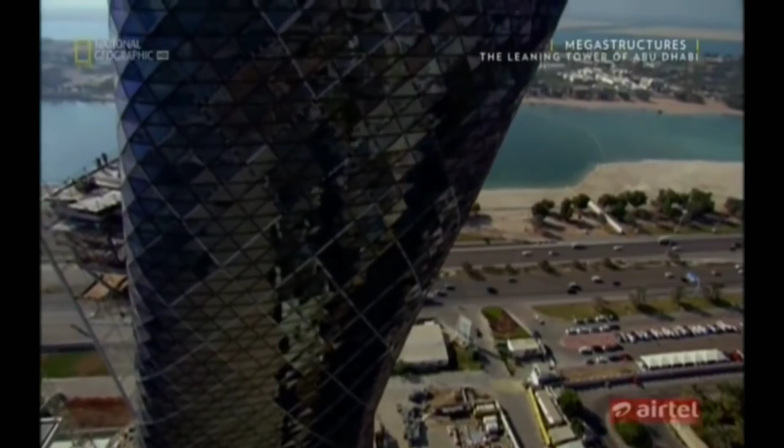You see the building and you stand underneath the overhang of it. It's extremely impressive. It's a fantastic feat of engineering. I feel as though I've been here an eternity, but it's probably been the quickest 2 years of my life. It's been an amazing journey and we've learned so much. And actually I think we've demonstrated that some things that looked impossible or even ridiculous were actually possible.

And Abu Dhabi's past will soon be physically linked to its future by a wave of steel that'll rise over the grandstand and splash up the skyscraper's mirrored glass. Abu Dhabi is a fascinating part of the world to be at the moment. It says to people we can step outside of the box. We don't have to follow the rules.

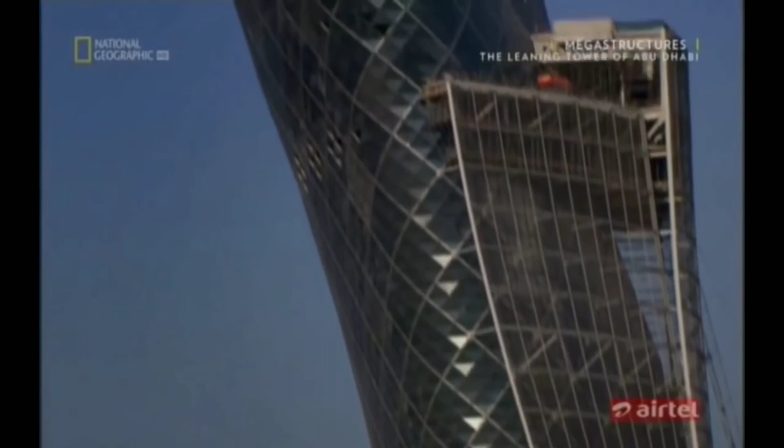With the 2010 World Future Energy Summit just weeks away, Sheikh Sultan can be sure Capital Gate will show the world what Abu Dhabi is capable of. This building is really iconic. It catches the spirit of Abu Dhabi and will be part of the postcard image of Abu Dhabi. The team have achieved what some thought was impossible. A leaning tower that claims the world record for the most inclined skyscraper on Earth.